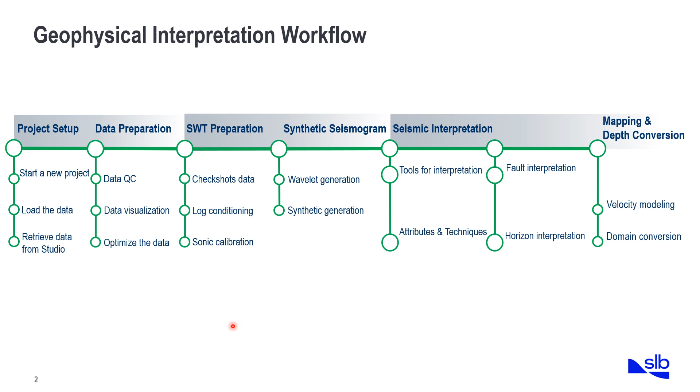So this presentation will start with a quick background on why we need the velocity models and what is their significance in seismic imaging, geophysical interpretation, and reservoir description. The focus of today's session is not seismic processing, though it is extremely important to understand or recap different types of seismic processing velocities before we venture into velocity modeling.

I will then go through the basics of velocity modeling and various approaches that may be used or applicable to address specific geological settings. Finally, in the end, I will show a few slides as part of a depth conversion learning game to recap or review what we have learned during this session.

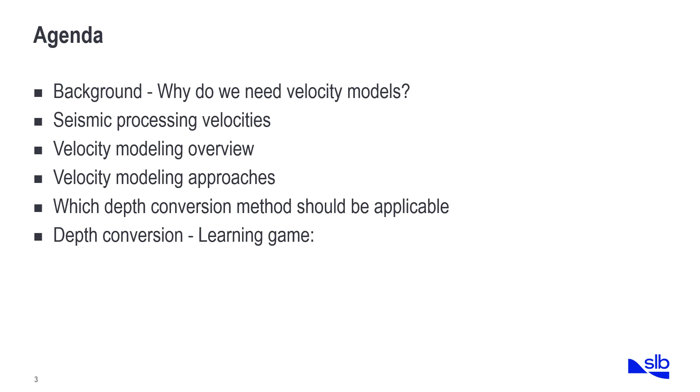So velocity models are the key components of seismic imaging and consequently of reservoir characterization. We can have different velocity modeling scenarios to test various geological uncertainties and unfold geological and G&G challenges. So integration of properly QC'd and tied seismic and well velocities is critical for effective velocity models.

When I say effective velocity models, it is because with poorly constrained velocity models, the depth conversion errors may account for over 50% gross rock volume uncertainty, which eventually affects the volumetric estimation. So therefore, it is extremely critical to capture the velocity models and the G&G uncertainties properly when assessing volumetrics.

So I've just mentioned briefly the significance of the velocity models. However, the two key or basic objectives of any velocity modeling project are to tie with the existing wells and to predict optimal depths at new well locations to be drilled.

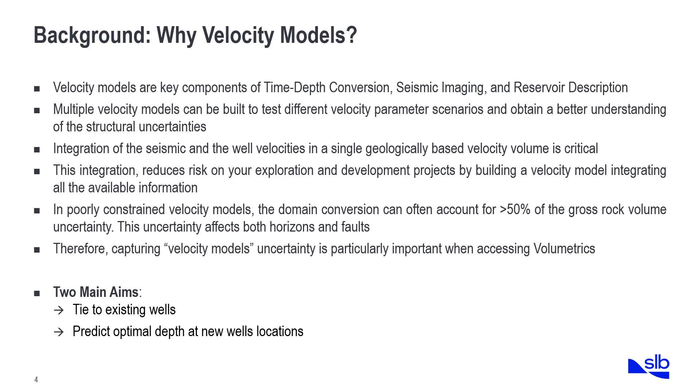So the question arises: geophysical interpretation is normally done in time, so why do we need to convert into depth in the first place? As long as we are doing seismic facies or sequence strat interpretation, we are okay in the time domain. However, it would still be more meaningful to have the results in depth.

However, when we move to structural interpretation, which is riskier, as indicated in the cartoon on the left hand side, you see our zone of interest is just below the high velocity carbonates, which is the situation in reality. However, when we are working in time, because of the higher velocities just above our unit of interest, you can create a pseudo structure because of the velocity pull-ups. So it is really critical to properly depth convert the data, so we are not misled by these pseudo structures.

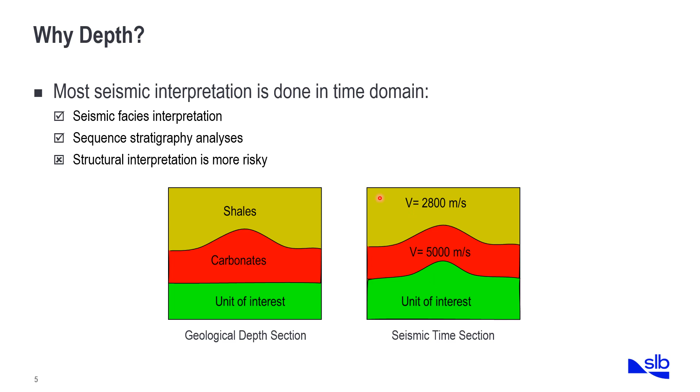So in addition to the two basic objectives of velocity models, as I mentioned earlier, the other key applications of velocity models are to verify geological structures, confirm the structural traps, and once you have confirmed these structural traps, you can determine the spill points, estimate optimal gross thicknesses, volumetrics, and finally you can validate with the production data, and everything is in depth.

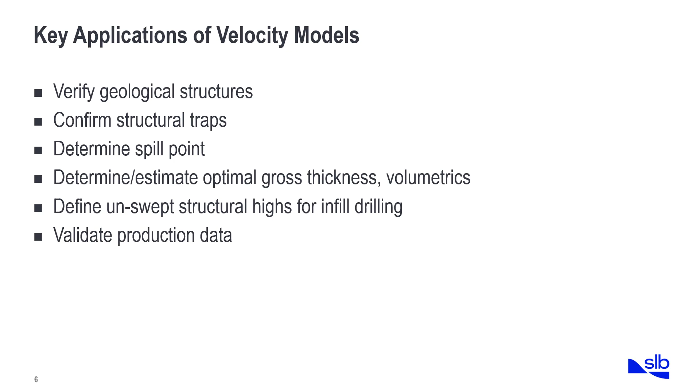So velocity model is a very simplistic cartoon, but it gives you the basic message that the velocity models bridge the gap between the time and depth domain. So the domain conversion workflow is basically a two-step process. A velocity model is defined, and then we do the domain conversion of different data objects.

So in order to define a velocity model, we start by defining the intervals based on zones, usually between time interpretation surfaces. Then we define velocity functions. They can either be automatically calculated or user defined. Then we can have different outputs as part of the velocity modeling workflow, velocity cubes, V naught or K for QC purposes. And once we have the velocity model in place, we can do the domain conversion of a single object or multiple objects, or interpretation data as we like.

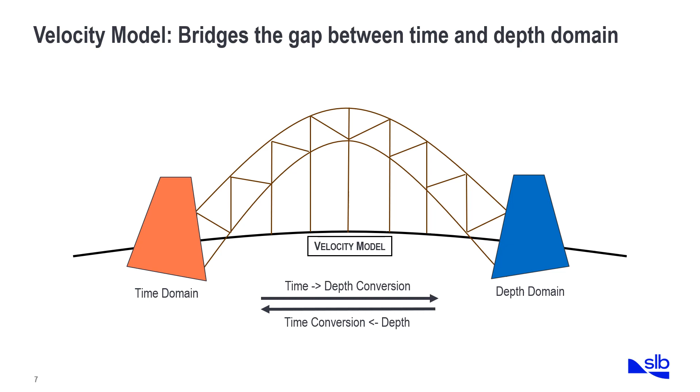So what does depth conversion actually mean? As I have explained earlier, we need to build these velocity models in order to optimally depth convert the data in order to have a realistic subsurface picture. And velocity modeling, as we all know, is an iterative process. We start with a very basic velocity model, and then we keep on adding additional data to capture a lot more uncertainties and to have a more robust velocity model in the end.

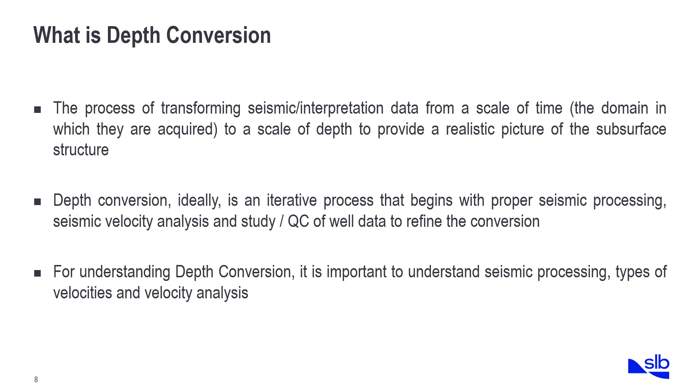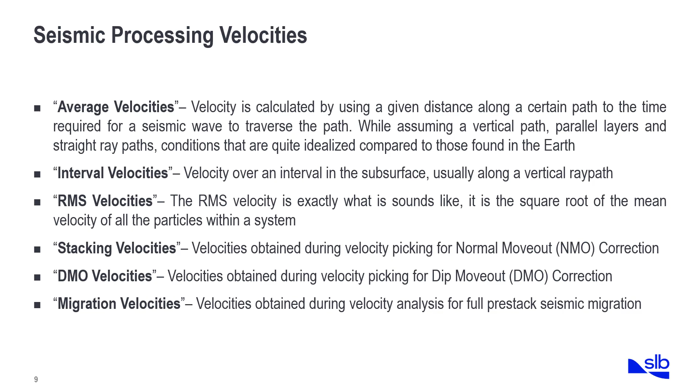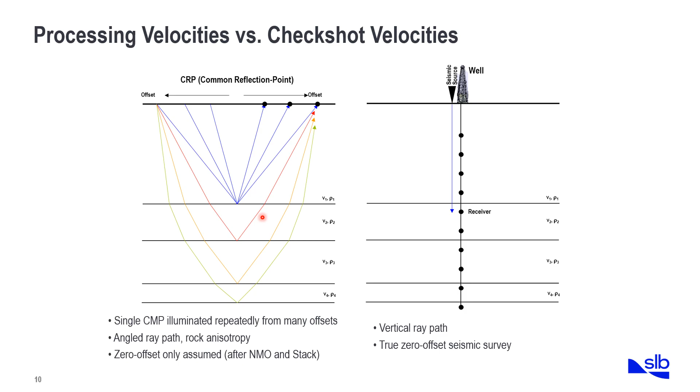So in an advanced velocity model, we make use of both these data sets to effectively capture the lateral and vertical velocities. So we have to understand both the pros and cons of both of these data sets, and make the best use of both data sets in our velocity models. So now let us quickly review different types of seismic processing velocities.

The average velocity is the simplest velocity, which is defined as the depth z divided by the one-way seismic travel time t. And the key assumption while calculating the average velocity is that it has to be a vertical path, parallel layers and straight ray paths. These are conditions which are quite idealized compared to the situation in reality.

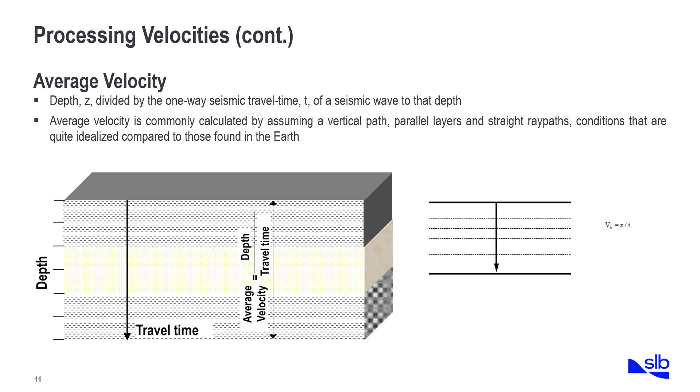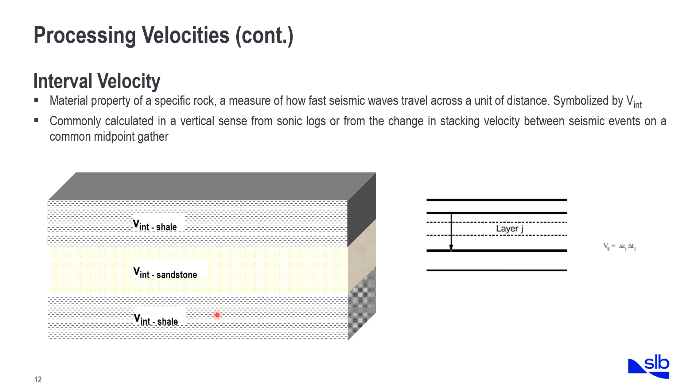The interval velocity is the velocity of a specific rock unit, and it is calculated from sonic logs or from the change in stacking velocity between seismic events. So in contrast to interval velocity, instantaneous velocity is defined as a velocity over a very small interval or at a given moment of a wave front.

They're also derived from sonic or acoustic logs. Typically, the readings are taken every few centimeters in a borehole, so they're considered to be more accurate, or I would say more detailed. So it depends what kind of uncertainties you want to capture in your velocity model, and based on your objective, you can decide what kind of velocity property you want to use in your velocity model.

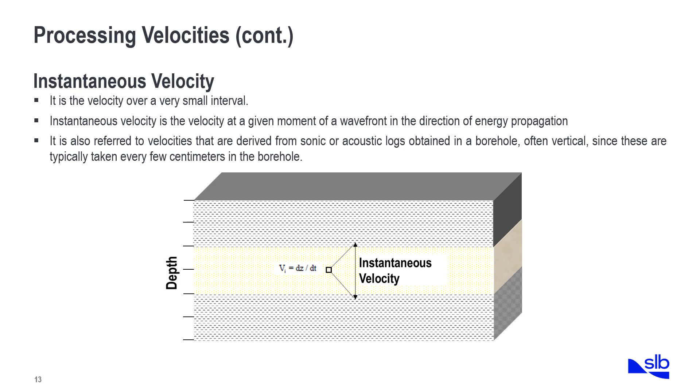Now, RMS velocity, as the name indicates, is the root mean squared velocity, which is the square root of the sum of the squares of the velocity values divided by the total number of values.

So the important point to note here is that the RMS velocity is typically a few percent higher than the average velocity across the same interval, and the key reason for that is the root mean squared velocity is the average speed of an object on a given axis, whereas the average velocity is the total distance traveled divided by the total time spent traveling that distance. So that is why RMS velocities are slightly higher than the average velocities.

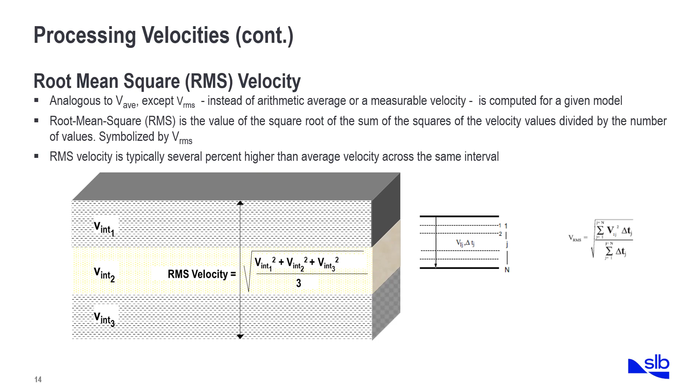Now, stacking velocities are one of the very important types of seismic velocities. Stacking velocities are obtained during velocity analysis prior to stacking and are calculated as part of NMO correction on seismic trace gathers.

NMO is actually the delay in arrival time because of increasing source-receiver offset. This time delay introduces a hyperbolic effect in seismic gathers before NMO correction, as shown on the left-hand side of this picture. You can see this hyperbolic effect, whereas the right-hand side of the picture shows the same seismic gathers after the application of NMO correction. So NMO is basically the amount of correction required to flatten the events before they can be stacked.

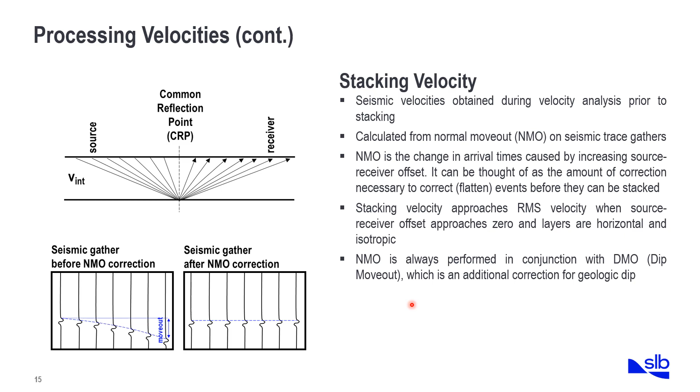Another important point to be noted here is that NMO is always performed in combination with DMO, which is the dip moveout. In case of dip moveout, the arrival time delays are caused by the geological dip, not by the offset, which is explained in the next slide. So this time delay, which is caused by the geological dip, also ends up creating the hyperbolic effect, and similarly as in the case of NMO, we apply DMO to correct these geological dips.

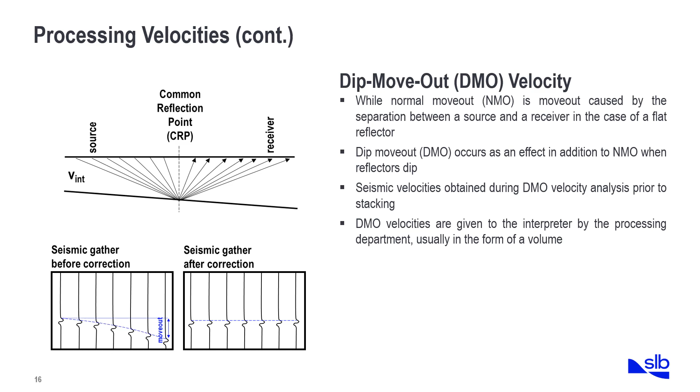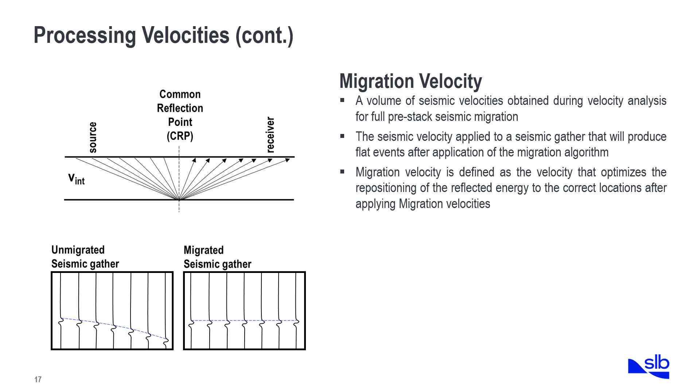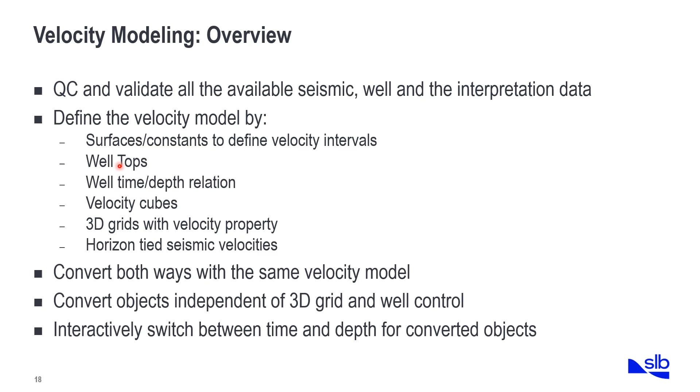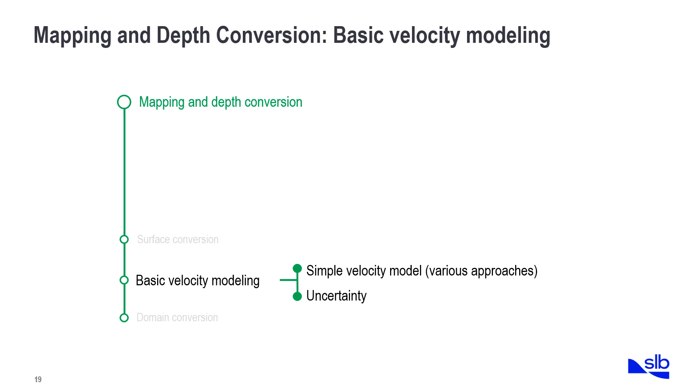At the end of every seismic interpretation or G&G interpretation workflow, we do the mapping, and once we have done the mapping in time, we start with a simple velocity model and then go through the iterative process, as I've explained earlier. We start with the basic or simple velocity model, and then move on to the more advanced velocity model depending upon the uncertainties that we want to capture and what kind of data we have available. In the next slide, we are going to discuss the commonly used approaches for velocity modeling.

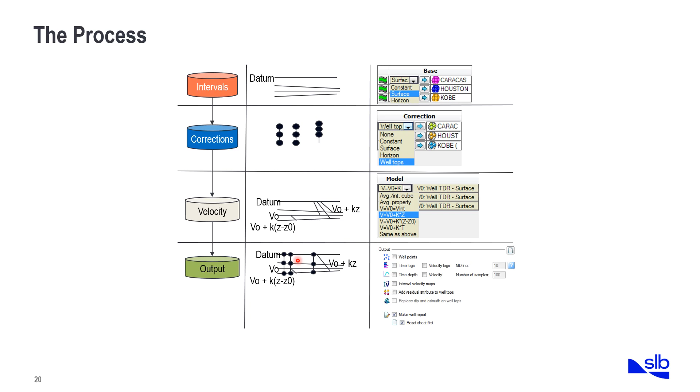So this slide basically recaptures graphically the same thing. We start with defining the intervals. We can do the velocity models with and without correction. And then we define these velocity functions. And finally, we can have the outputs as part of the velocity modeling QC.

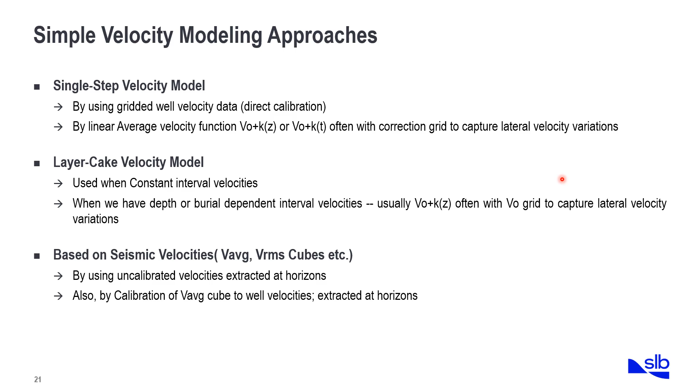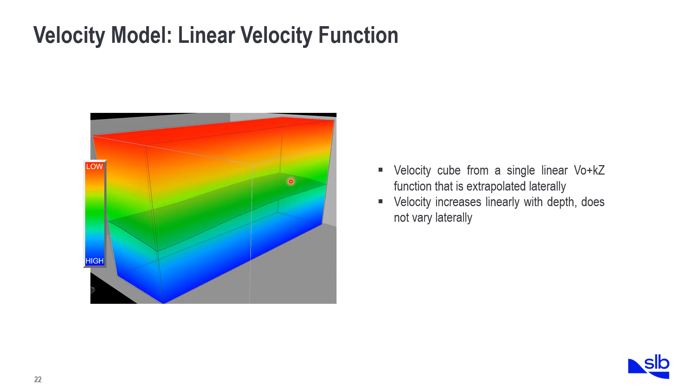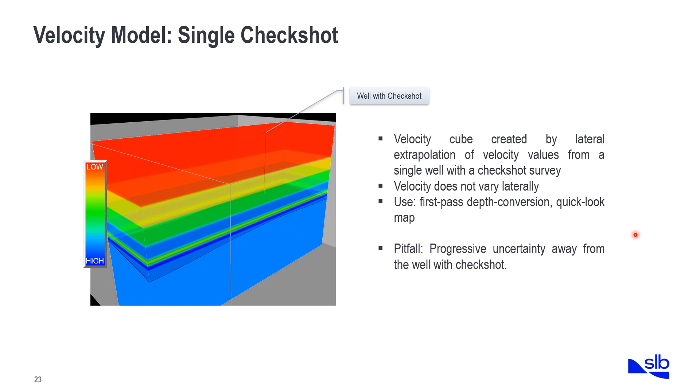In the next slide, you will see an example of a layer cake velocity model using only a single check shot. We create a velocity model by laterally extrapolating the velocity values from a single well. This velocity model can be used as a first-pass quick-look velocity model. But the biggest uncertainty in this case is that the velocity uncertainty progressively increases as we move away from the well with the check shot.

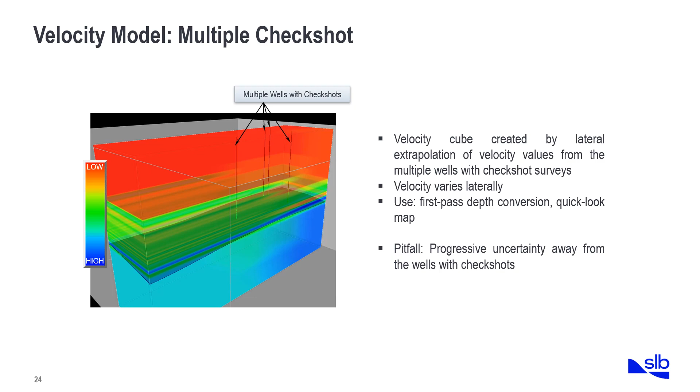Now, since we have already gone through the basic velocity modeling approaches, we can discuss which depth conversion method in general will be more applicable in a certain geological situation. The single step depth conversion method is normally created using the time depth relationship or check shot data or V average, and they are usually considered appropriate for deep tertiary basins with clastic infill.

They're not considered adequate if overburden contains thicker layers with a lot of velocity variations. However, on the other side, the layer cake depth conversion method is usually considered adequate in cratonic areas with condensed geology and substantial velocity contrast. To clarify, you may already know, but a craton is a stable interior portion of a continent, characteristically composed of ancient crystalline basement rocks. And this layer cake depth conversion method is not optimal next to or below mobilized salts or shales.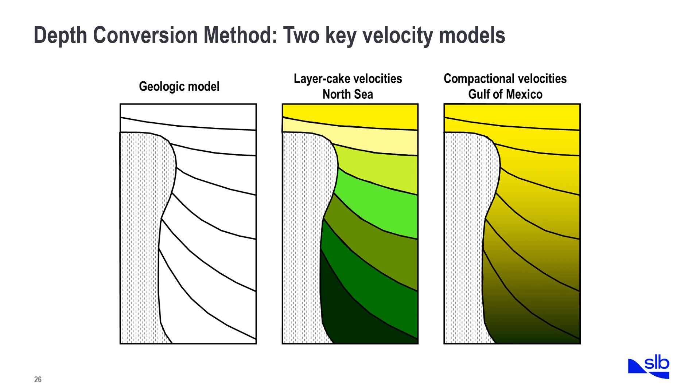The model in the middle is called a layer cake velocity model. This is typical of older, well consolidated sediments. Each layer has a rock velocity that is characteristic of that particular geological unit. One of the main causes of errors in depth prediction is mistie between seismic horizons and the corresponding geological well marker in time.

So those velocity models should always be preferred which have overall good predictability rather than having a zero depth error at the well location. There are always pros and cons of how much accuracy you want at the well intersection, because as a general rule of thumb, everybody wants to have zero error at the well intersection, whereas it is more important to have an overall good predictability.

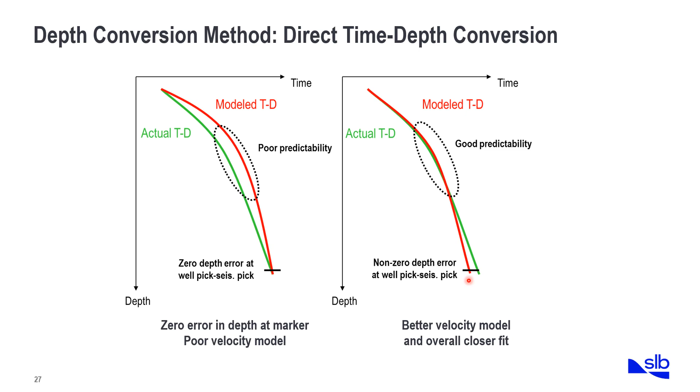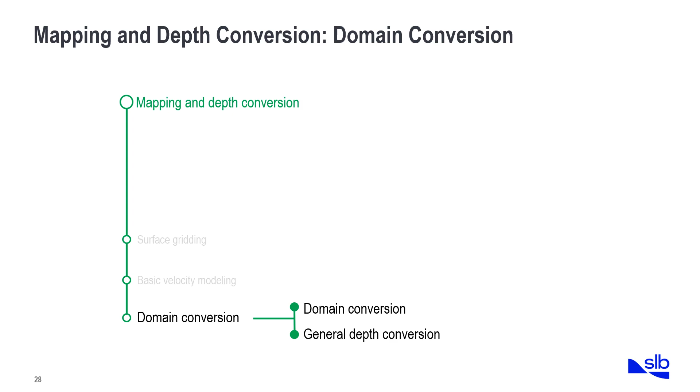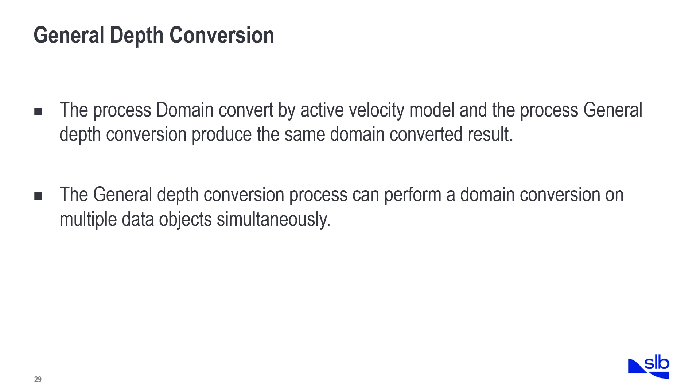Once we have a velocity model in place, we can do the domain conversion of different data objects. It could be one object or multiple objects using general depth conversion. In Petrel, different applications have their own modules, but once we have a velocity model in place, the depth conversion can be performed either on one single data object or multiple objects.

Then once we have a simple velocity model, we can have different kinds of velocity modeling outputs in order to QC our data. And finally, once we have the velocity model in place, we can do the domain conversion, and after the simple velocity model, we can have a lot more robust and advanced velocity models depending upon the geological challenges and the amount of data that we have.

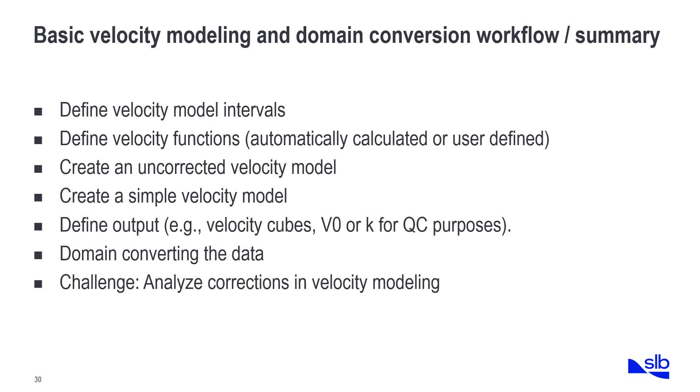So this slide basically recaptures more or less the same thing I've just explained. So we start with the uncorrected velocity model using surfaces, no correction, using a velocity function, and then we have a velocity model, and those outputs can be used to QC our depth converted maps or the depth converted grid, and we can have the residual maps to define the uncertainty in our velocity modeling.

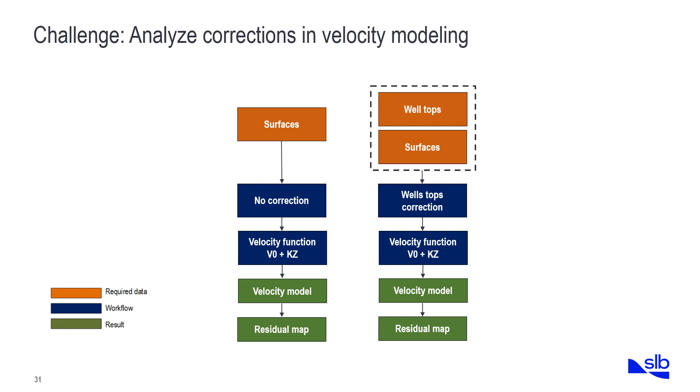And the second iteration could be to apply the well corrections. And then these corrections can be applied on constant surfaces, well tops, etc. So once we have our velocity model in place, we can do the domain conversion of multiple data sets. It could be grids, surfaces, horizons, faults, point data, seismic grids, seismic cubes.

So the key deliverables of any depth conversion project are the maps and the grids in depth, the seismic data volume, or the seismic attribute volumes in depth, velocity model in SEG-Y, and finally we can have the uncertainty analysis based on our residual maps, or we may have multiple velocity models to define the uncertainty in our calculations.

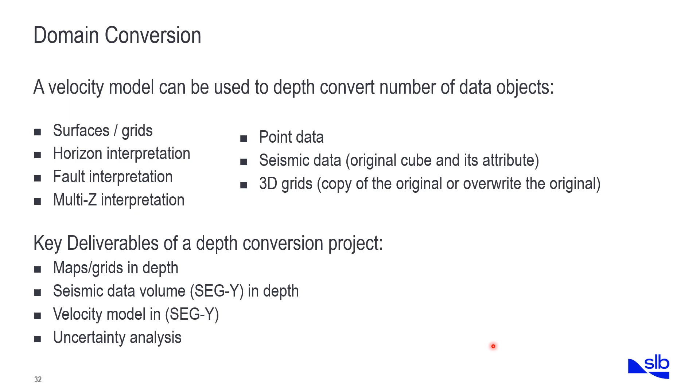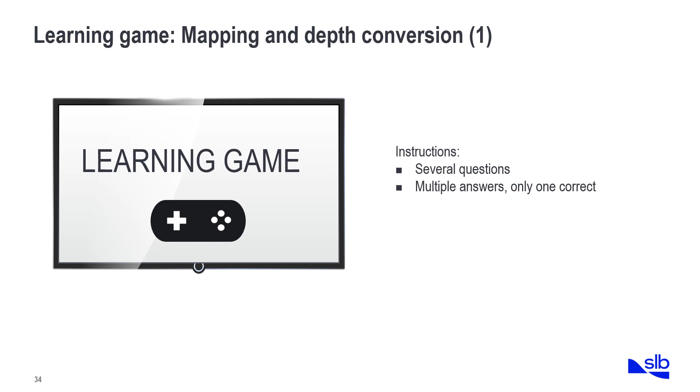So finally, moving towards the end of our session, we'll just go through some of the questions as part of the learning game. The idea of this learning game is to recapture what we have learned so far in this session, to review what we have learned. So I'll start with a few basic questions. It won't take too much time, but as a learning exercise, let's start that.

So the first question is, input to make grid surfaces can be of several types. Which of these types is not a suitable input? So we know that the grid surfaces can be created based on well tops, points, or horizons. So in this case, the correct answer will be the seismic cube.

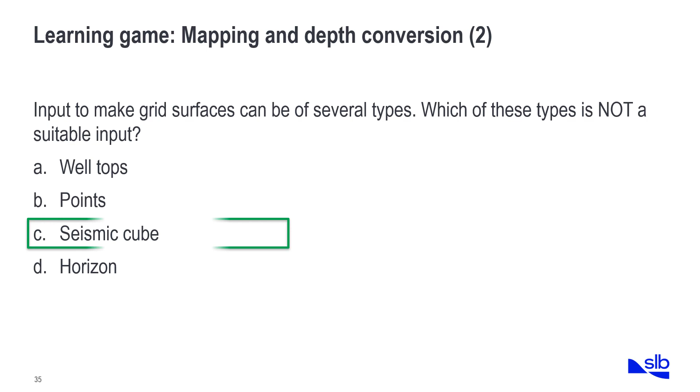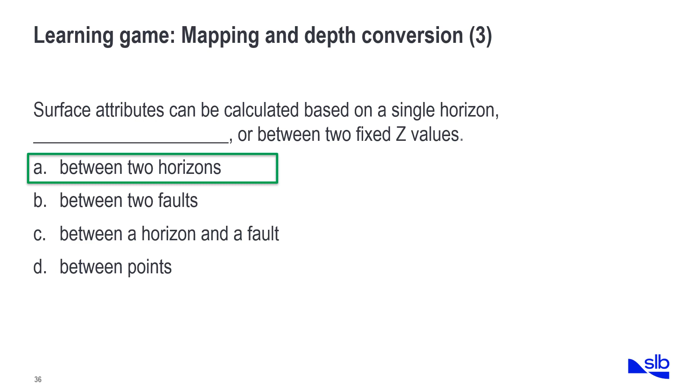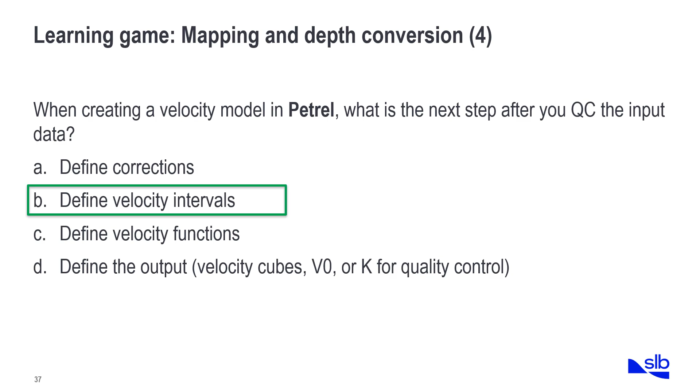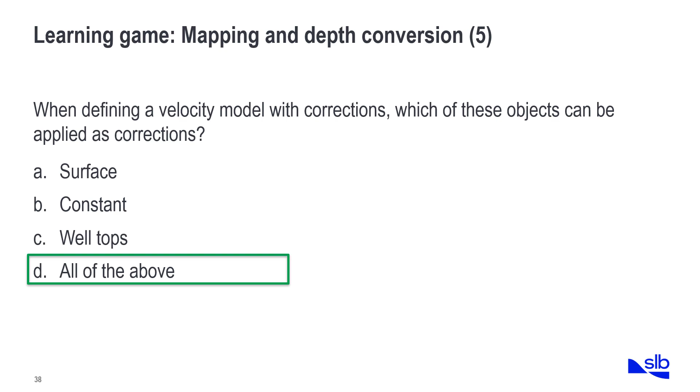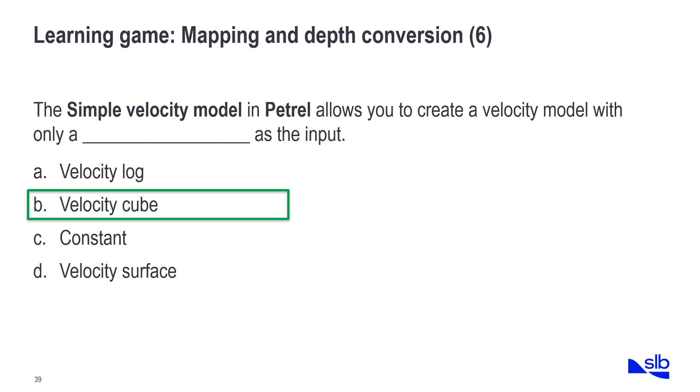The simple velocity model allows you to create a velocity model with only a dash as the input. And we captured this also during our discussion earlier. The simplest velocity model can be created based on the velocity cube. We may not have the well data or surfaces, anything, but at least the processing velocity cube we always get as a byproduct of seismic processing. So the simplest velocity model we can have is with the velocity cube, and we can start with an uncalibrated velocity cube, and we can have a second iteration with the calibrated velocity cube with respect to the well velocities.